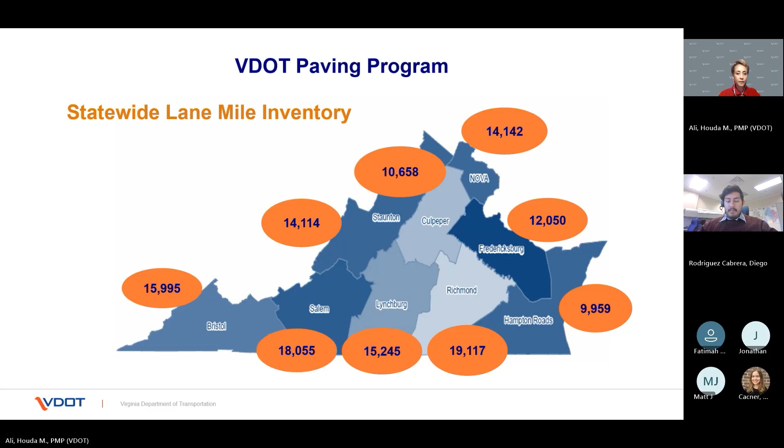The construction aspect of paving is a seasonal process, taking place during the warmer months of spring to early fall. However, the planning process is year-round. It starts in spring going into summer with data collection for the next season. Over summer into fall, we analyze the data, determine how much need there is compared to available funds, and prepare schedules and coordinate with central office and other stakeholders. Then in winter, we close out previous contracts, put out new contracts for bids, and award and execute the new contracts by February, March of each year.

So how do we select roads for paving? This is a question we get quite often. VDOT identifies which roads are selected for paving using a rating system called the Critical Condition Index, CCI, which ranges from 0 for very poor to 100 for excellent condition. The process is generally data-driven and based on several factors: pavement condition using CCI ratings, traffic volumes, avoiding locations in conflict with VDOT and locality projects, avoiding locations where underground utility projects are planned, and grouping projects for economies of scale. That means when we consider an entire neighborhood, if a main street within it is selected for paving, we try to achieve efficiency in contractor mobilization.

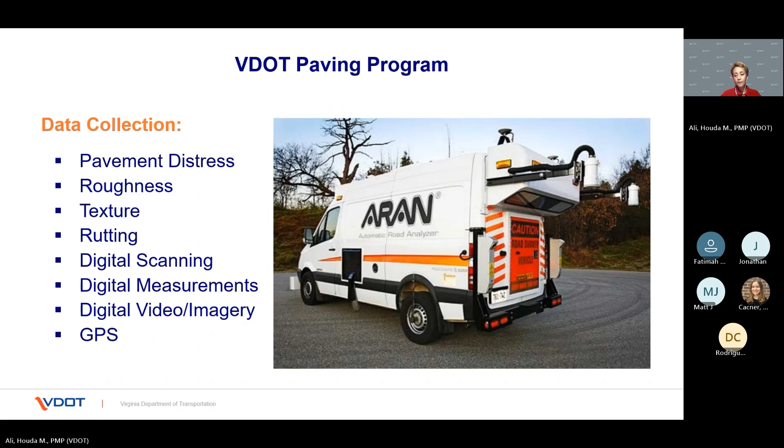The frequency of data collection depends on the type of roadway. Data is collected annually for interstate primaries and high volume secondaries with average annual daily traffic higher than 3,500 vehicles per day. For low volume secondary roads below 3,500 vehicles per day, and those are the ones with route numbers of 600 or higher, and make up the majority of lane miles, including residential streets, we collect data on 20% every year with the goal to cover the full inventory every 5 years.

Once the pavement condition data is collected and analyzed, it gets translated into a rating on a scale from 0, being worst, to 100 being best, like in the case of a new road. The rating system we use is called CCI, which stands for Critical Condition Index. We focus on very poor and poor roads with sufficiency ratings below 60 CCI. We do not pave roads with ratings higher than 60 CCI.

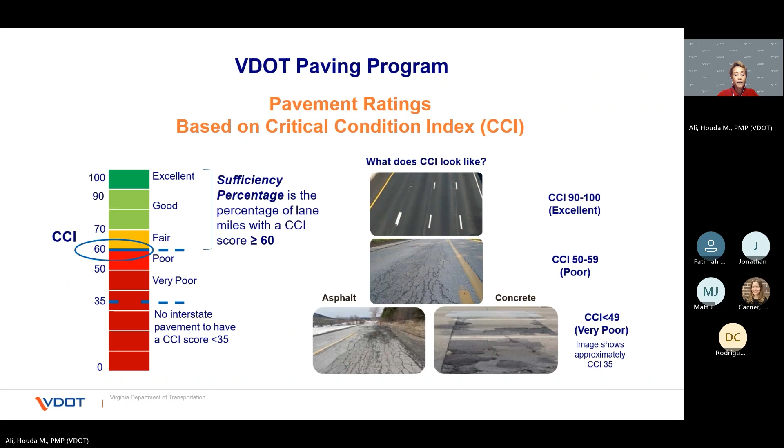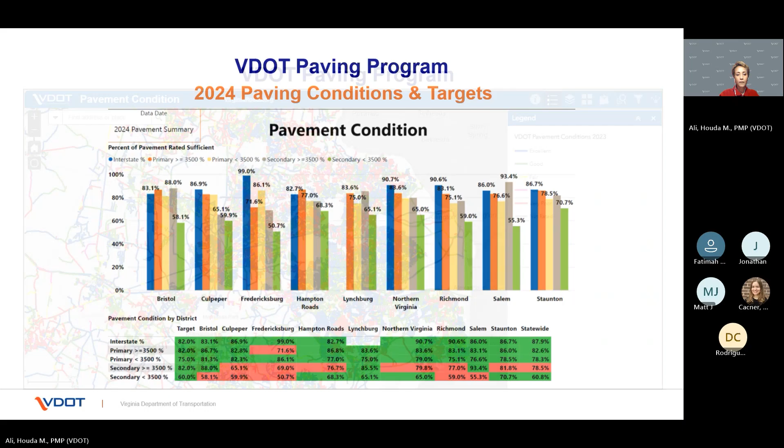On this slide, you see a screen capture of the VDOT pavement condition map.

In general, there are two main types of treatments. Preventive maintenance treatment, where we try to extend the life of pavement by applying slurry seal. We also do limited patching and crack seal. Candidate roads are typically not in poor condition and have a CCI rating of 60 or above.

In regard to corrective maintenance, we do mill and overlay, 2-inch most commonly, and up to 4-inch depending on road condition. This treatment is most common and targets roads in poor condition. In rare occasions, we may have to replace the pavement to full width, to full depth, and rebuild the road. Roads targeted with this type of treatment are typically very old and built to old standards.

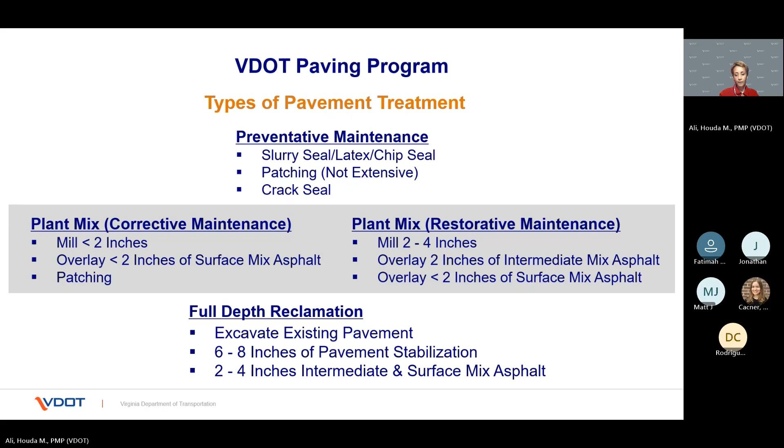So what that means is we are not able to pave as much as we did in prior years due to the lower budget. However, because of the lower cost per lane mile, we're able to stretch our dollars further to pave a little more this year.

Our VDOT infrastructure and maintenance teams have determined that about 43% of our low volume secondary roads have critical condition index ratings in the 30s and 40s, indicating very poor condition, and are due for repaving. At current funding levels, we pave about 6% of the road network each year.

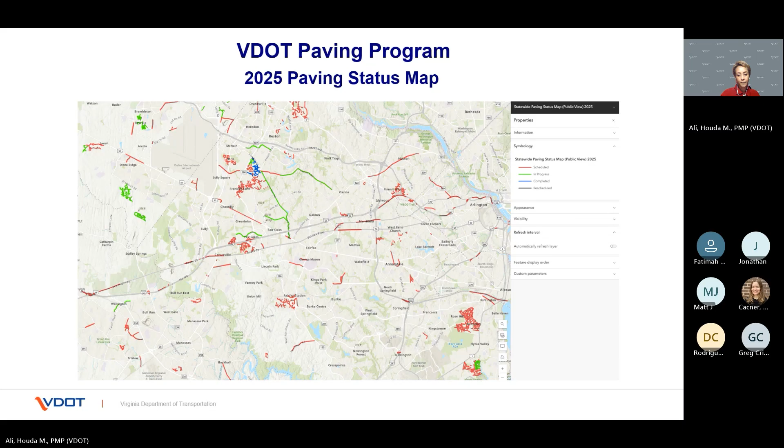VDOT restripes most commonly to replace in kind, putting back what was existing before we mill and repave the road. We may occasionally restripe to address a traffic condition, like extending a turn lane, for example, and to enhance safety and operations.

We also take the repaving opportunity to collaborate with the county to implement new marking patterns if existing pavement widths allow, to enhance on-road bike routes, and to add new crosswalks where feasible to improve pedestrian safety.

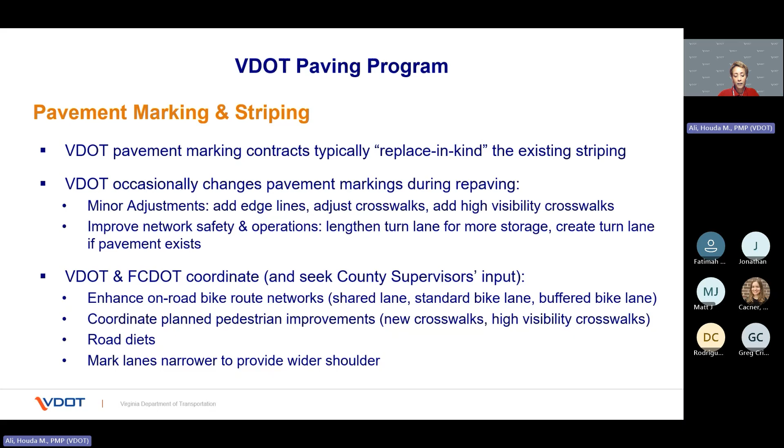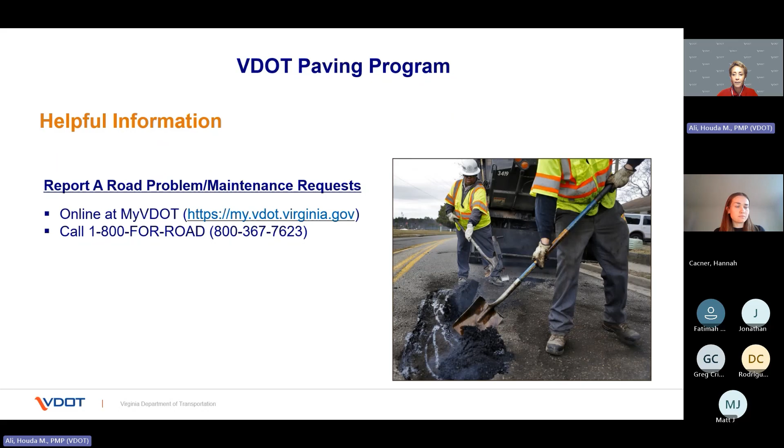Thank you, Houda. As I mentioned, the county did not find any opportunities to add striping improvements in terms of bike lanes or crosswalks in Mount Vernon district this year.

So we do not have a presentation for tonight, but we will open up the floor to questions at this point, and I'll just run through a few instructions on how to do that.